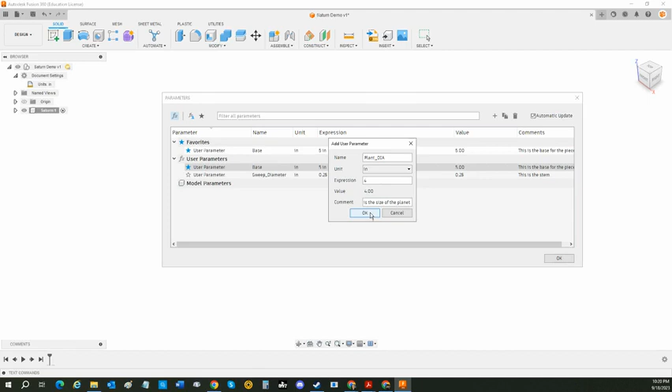So I have my base, I have a sweep. Let's make another one. We'll call this one planet, and I'm going to put underscore RAD, which stands for radius. Actually, I'm going to do diameter, DIA. Planet diameter, and that is going to be in inches. How big do I want to make this thing? Let's make it 4 inches for now. This is the size of the planet. That one may be changing, so I'm going to put that up top also.

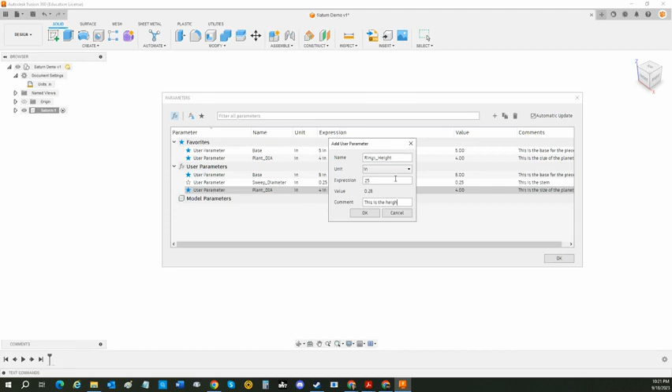So I have a base, I have the sweep, I have the planet diameter. I need the rings. So, rings... that should have been underscore. Rings height, I'm going to make this thing point, I don't know, 0.25 again. That sounds fine. This is the height of the rings.

Happy with that. Next one is going to be rings width. Make sure again it's all one word, so underscore rings width. And I'm going to make this thing 0.33. Let's make them a little bit wider than they are tall. This is the width of the rings. Oh my gosh, I can't spell this evening. Rings, there we go.

And finally, I'm going to put in here ring spacing, S-P-A-C-I-N-G, there we go. Ring spacing. And I'm going to make this one 0.4. This is the spacing between the rings.

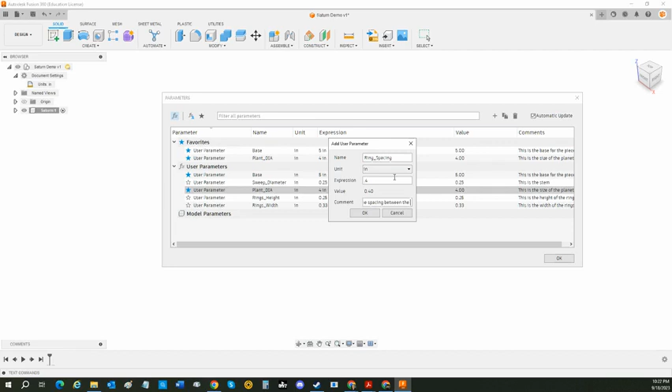I know a lot of these don't make too much sense for you, but go ahead and set these up, they're going to make your life a lot easier. So I have a base of 5 inches, a sweep diameter of 1/4 inch or 0.25, a planet diameter of 4 inches, a ring's height of 0.25 or 1/4 inch, a ring's width of 0.33 inches, and a ring's spacing of 0.4 inches. The neat thing is we can change these things around once we have Saturn built, and it will look just like how we want it to.

So I'm going to say okay, let's start creating. I'm inside of Saturn here, I have my focus on this. I'm going to go ahead and expand it out a little bit so I can see what I'm doing. I'm going to create a new sketch, and I'm going to put it right here on my XY.

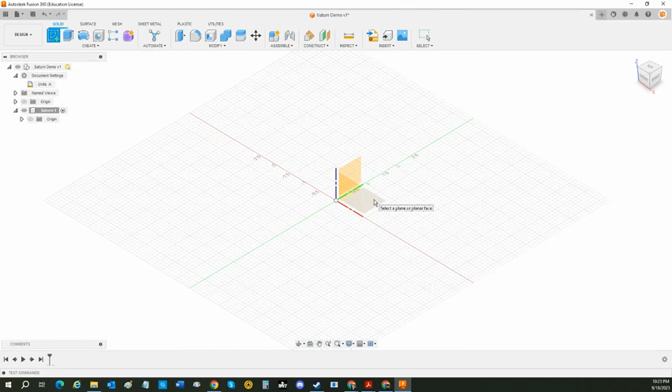Again, if you look at the view cube here, the red line is X, the blue line is Z, which means the line going opposite, which is green, has to be Y. I want to put this on the XY because if I was going to 3D print this, I would want it working from the base up.

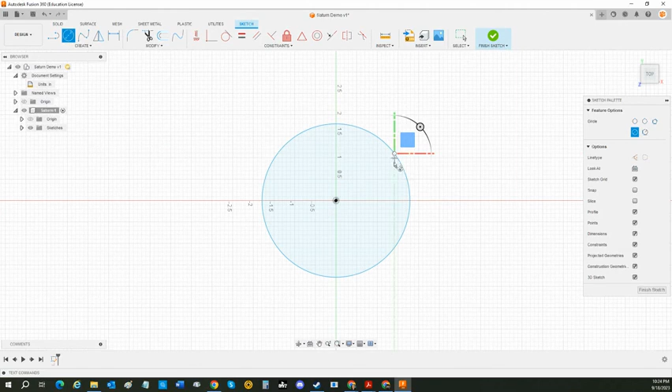So I'm going to select that, and I'm going to create a center diameter circle. I'm going to put this right on the center and pull it out, just like that.

Very good. Now I'm going to dimension this. We've done this before. Click the line, put it out here, and I call this one base. Yeah, the base. There it is, 5 inches. I'm happy with that. I'm going to finish my sketch.

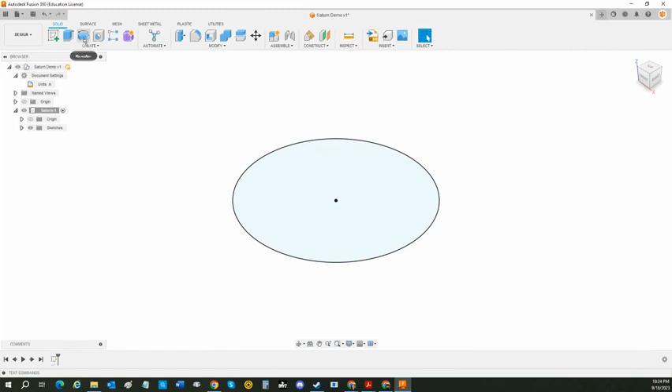I'm going to extrude this thing and bring it up, maybe 0.5 inches, and put it at a 45-degree taper, negative 45-degree taper. Ooh, that's ugly, maybe not so much. How about a negative 20? Yeah, it's better, I like that. Negative 20-degree taper. And it's going to be a new body.

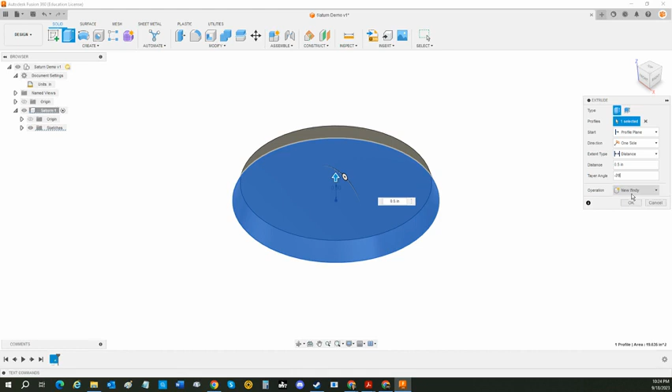And there we go, we're happy, sitting out in space. I'm going to go ahead and take this body here and expand it over here in my browser. Right-click body 1 and rename this thing. Where's that? Rename, there we go. And this is going to be my base.

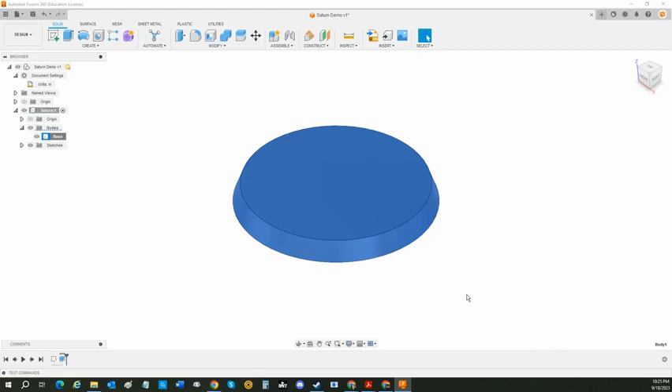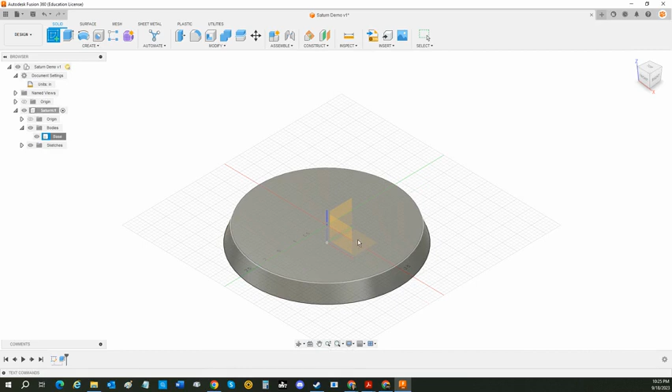Woohoo, I'm happy. All right, let's create. We're going to stay in sketch here because we're going to make multiple bodies in here. So I'm going to create a new sketch, and this one I want it to go perpendicular to what I have here at the bottom. So if I did XY before and I want this thing to stand up, I am going to do my XZ plane. You can see it pops right like that.

All right, so what we're getting ready to do is a sweep here. This is a really, really cool thing to do. It takes two steps, but again, it is really cool, so work with me on it. We have a create, and I want to create a spline.

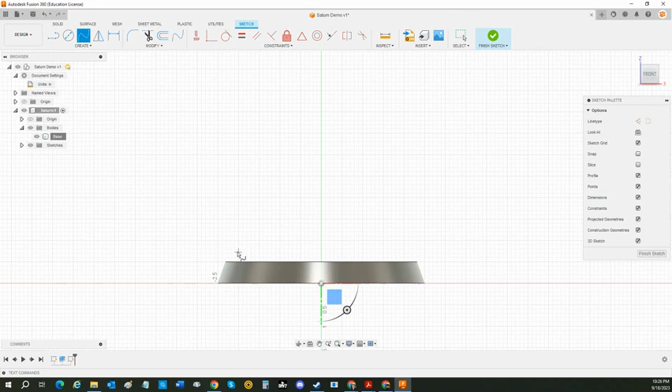A spline basically is a line that has curves based off of points. So I did add a new thing to you I didn't tell you about. And I'm just going to go ahead and create some type of S here, put a few things in here.

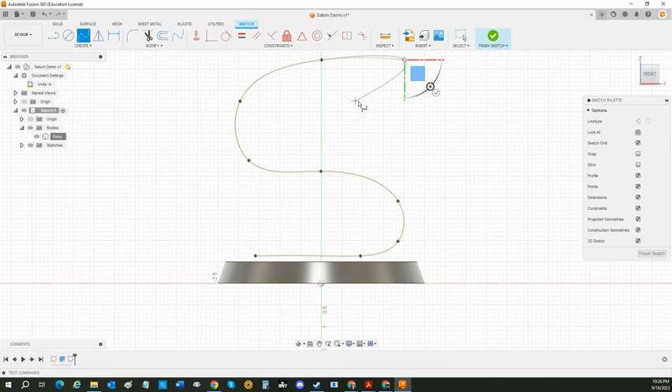It's up to you how you do this. I have found that putting dots in the center line here helps me out a little bit. So I'm happy with that. When I'm done, I'm going to come grab this check mark and hit the check. And there we go, I have this really cool little S going.

Next thing I'm going to do is see if I can put a dimension on this thing. I'm going to go from the bottom line here. It's not going to let me. I think that's a base point to the base of this thing. And we've made that point two. There you go, and it kind of moved up a little bit.

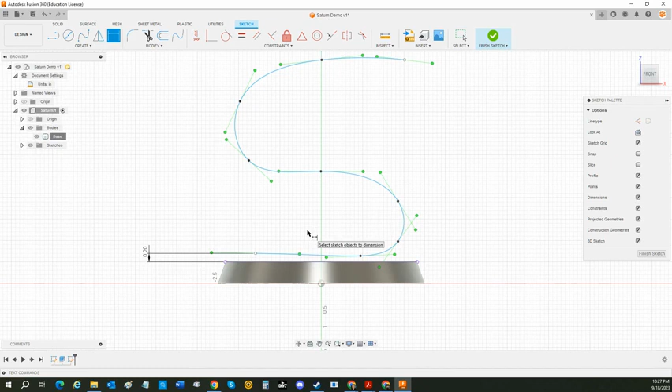I'm happy with that. I could align these things if I wanted to, but I think I'm going to be happy here. Yeah, I could move this up, but I'm going to be happy with that. All right, so I have this sketch here, which is my S.

I'm going to come back here. You notice I've already violated rule number 2 of Fusion, which is name everything. So I need to name these sketches here. I'm going to name sketch 1, that was my base. Sketch 2 is my S path. All this is a path is the only thing we drew here.

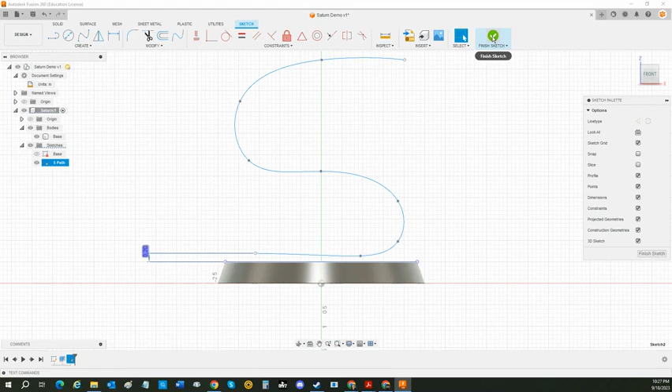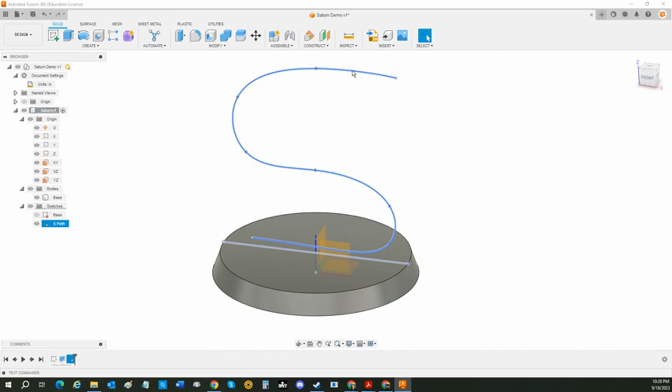Looks pretty cool, so it's sitting out there in space. Looks pretty. Woohoo. All right, the next thing we're going to do is create an offset plane. What an offset plane is, as we look here at the origins, if I were to show these planes, before we had our XY, our YZ, and our XZ planes, I can also put a plane out in space. For instance, the top of this base here is a plane. This edge here, if I were to find a flat spot of that, that would be a plane. But what I want is a plane that is completely perpendicular, or at 90 degrees, to this S.

So what I'm going to do is come up here under Construct, and I am looking for Plane Along Path. Here we go, it's saying what is your path? Here's my path, and I can put this thing anywhere I want. I'm going to take this arrow here, you see I can just drag the arrow, it goes everywhere I want. Woohoo, I'm going to put it all the way to the end because I want this thing sitting directly at the end of this thing. So I'm happy, and I'm going to say OK.

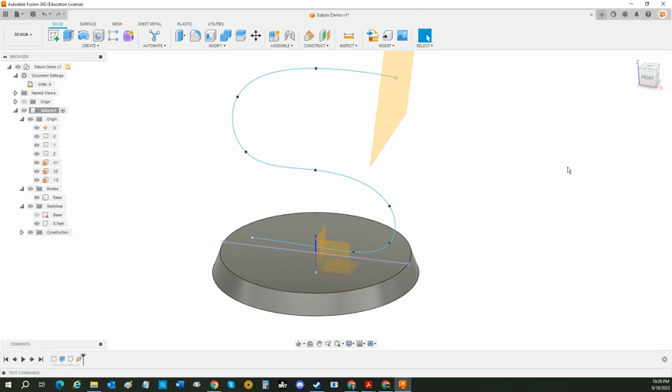This is that construction plane, and that's what I'm going to work off next. You're going to see also it shows right here under my browser, under construction. This is the plane here. I'm going to name this thing plane for sweep.

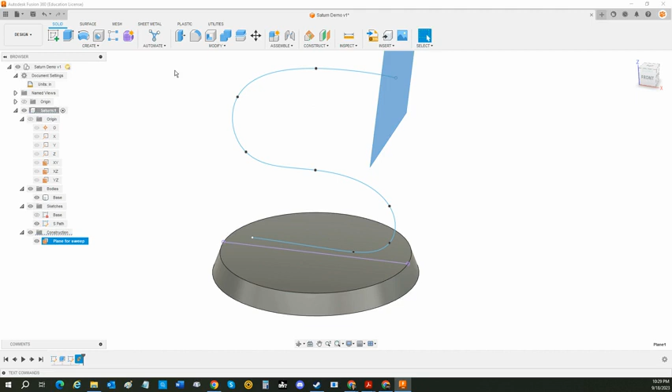So I'm going to make my circle here and be happy. Let's create a new sketch right on that construction plane. I'm going to come right off the center spot here because that's where I have this thing sitting on.

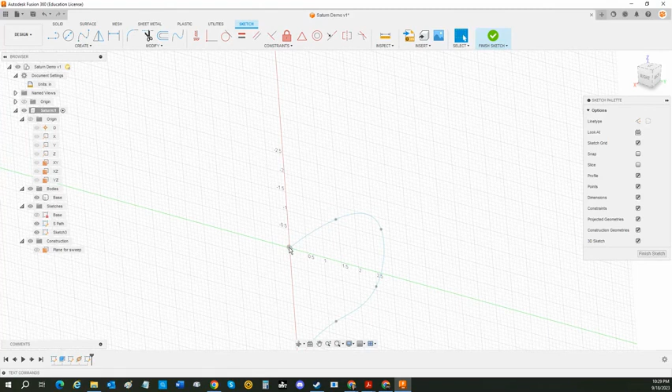If I were to flip this thing around a little bit, you can kind of see it. That's where that plane is, along my path. It ended right here where I put the origin point, which is very helpful to me. So I can create a circle right here. I don't care how big it is because I'm going to put a dimension to it.

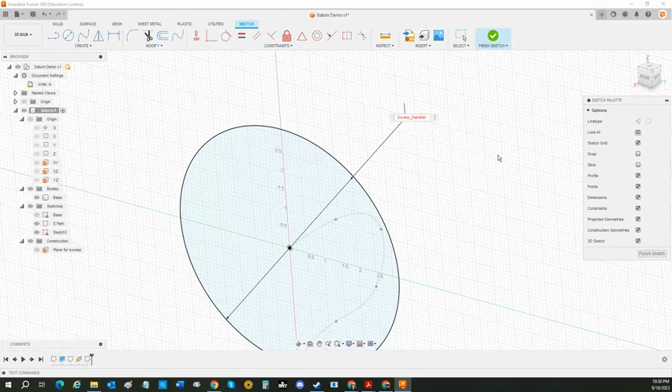Now I'm going to put my dimension. And what did I call this thing? Sweep diameter, there it is. I now have my sweep diameter. I'm happy with that.

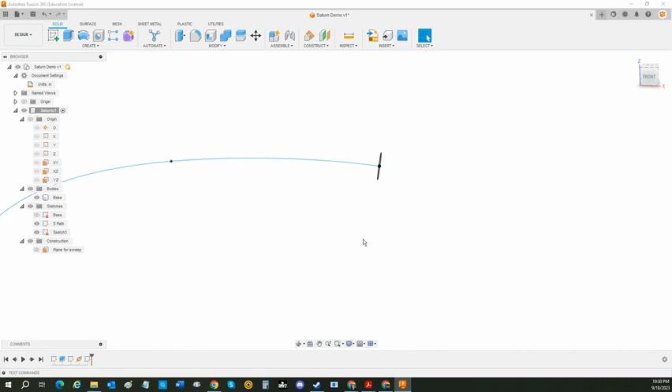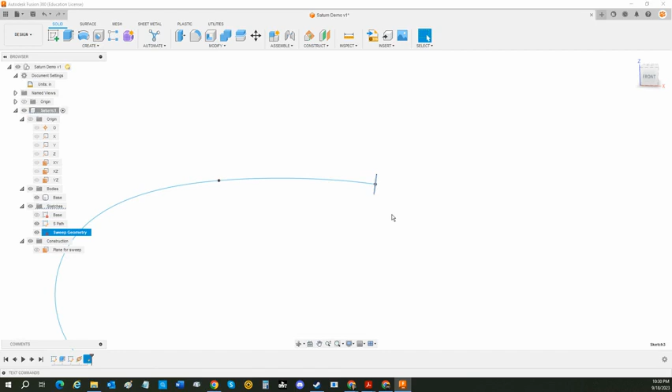Okay, so I have my path, and perpendicular to it, I have this little circle here. If I wanted to look at that plane, it's right there, but I don't need to see it again. I am going to name sketch 3 here. This is my sweep geometry. It is a sweep geometry, but you can call it something else if you want to. I don't know, circle for the sweep, whatever. But it's a sweep geometry for me.

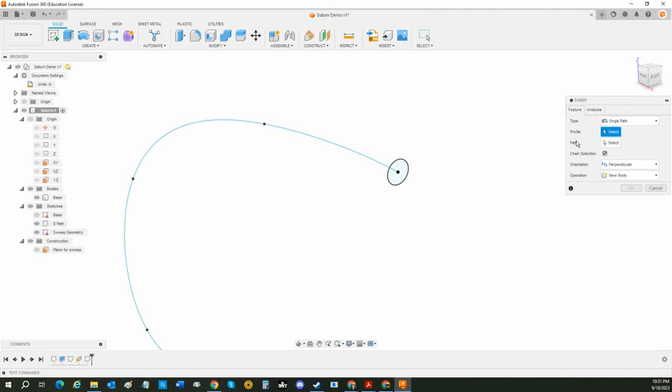All right, let's watch the magic happen. I'm going to come under Create here, and I'm going to come down to Sweep. It brings up this neat little tool. I'm going to zip this around a little bit, zoom in. My profile is that circle, my path is right here, that S path.

And there it is. What this thing just did - I'm going to put this to the home - it just created that profile all around this path. It even turned it and everything for me, so I'm really happy.

I can change my orientation to always be parallel. It looks pretty ugly like that. In fact, it doesn't even work. So I'll go back to perpendicular.

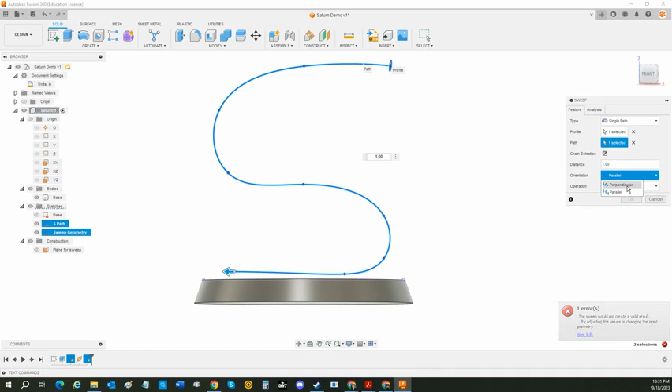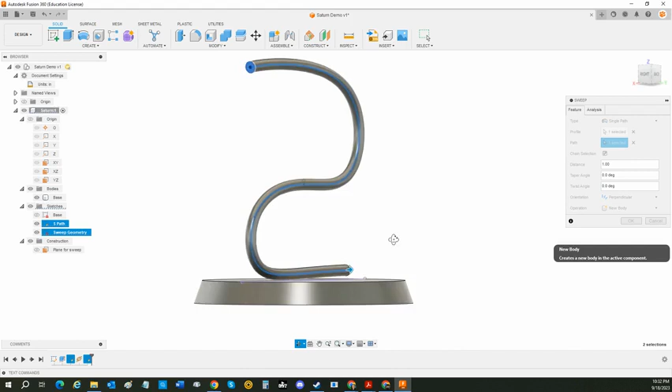Happy with that. My operation, I can join this to the base if I wanted to, or I can say it's a new body. I'm going to make this a new body. I'll probably have to bring this down a little bit, but that's okay. And say okay. There we go.

I now have that neat little S for Saturn. I'm happy with that. Again, I might make that a little thicker. It looks a little goofy. Let's come back here to my parameters, change parameters.

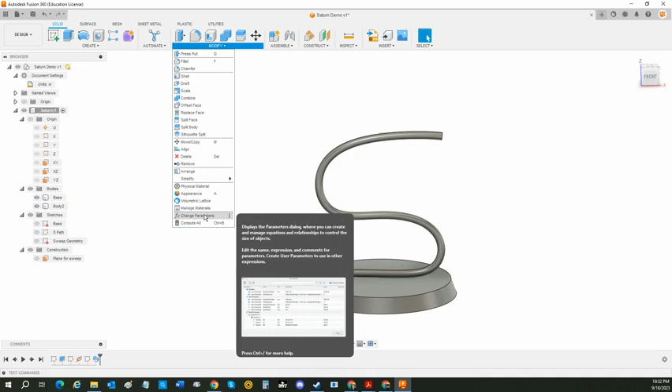And I made that down here, sweep diameter. I'm going to bring it up top here. I'm going to make that 0.35 maybe. Say okay. It looks a little better, a little thicker. And it's now coming into my base here, so I'm happy. I like that, I like it, I like it. Okay.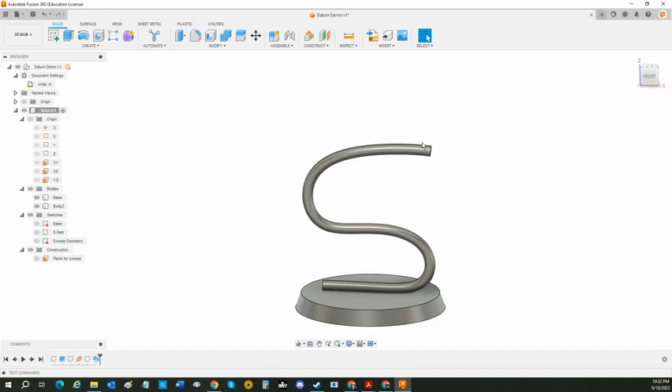Now let's go ahead and create Saturn. To do that, I am going to create a new sketch. Oh, I need to come up here real quick - this is my bodies, and this is my sweep. Everything's labeled, I like that. Minimize that, here we go.

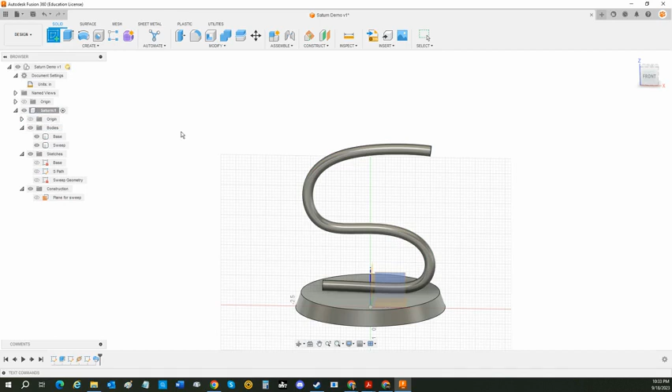My new sketch, I am going to put this on this plane right here. And what it is, it's parallel to my, or the same plane as my S here. So that looks like it's going to be my XZ - you can see it up here on my view cube. Put it right here on that plane.

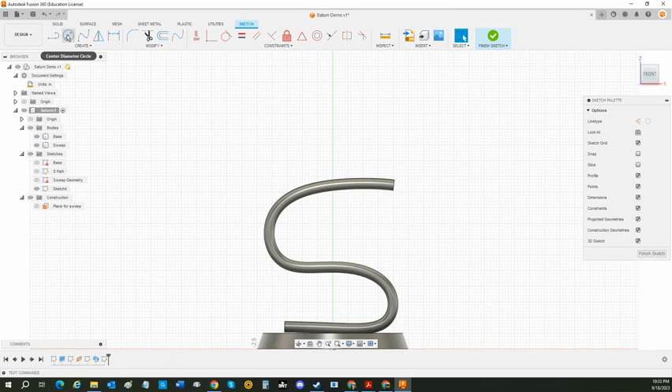And I am going to draw Saturn, or at least half of Saturn. So I'm going to create a center circle, make that nice and big. I'm happy with that. I am going to now dimension it. And this thing is planets, I believe I called it - planet diameter, there we go.

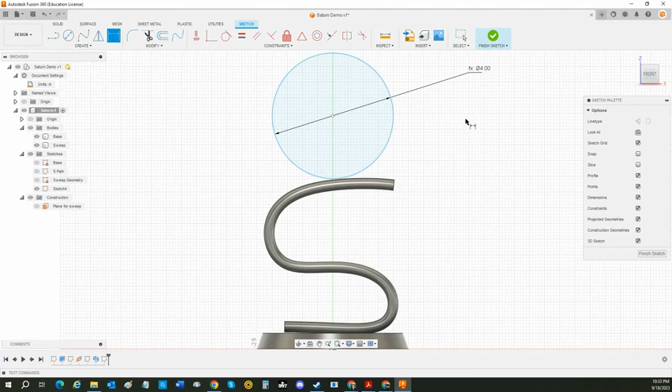Pretty good. I am going to put a line straight from the top here. You notice it wants to lock in based off of that axis at the top and at the bottom. There we go. And I'm going to take this side over here and get rid of it by coming up here to my trim tool - so there's another tool I didn't tell you, you're going to learn. I'm going to trim off this left side. So I now have half a planet, but that's exactly what I want. Very good.

And you can see it's still giving me my diameter, so I'm happy with that.

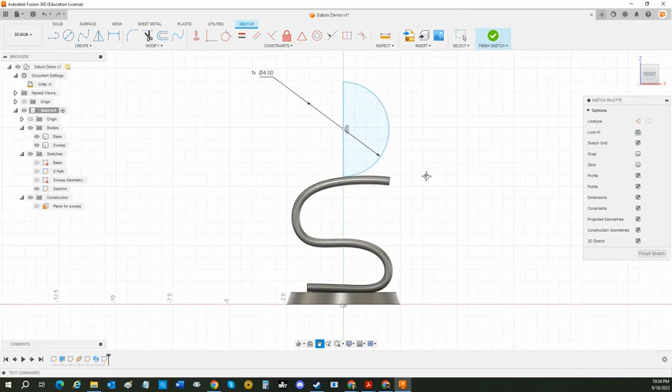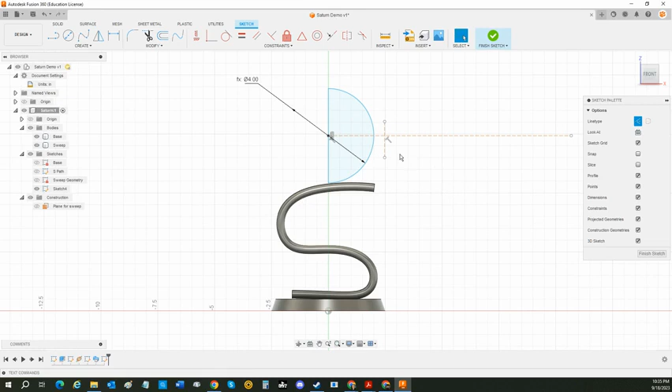All right, let's create some rings for Saturn. I'm going to make a construction line just so I know what I'm working off of. I grab the line, grab construction, come right off the center point, and go straight out. It just gives me a spot to line up and start with, makes my life easier. I'm going to grab another one and pull it off of Saturn here just a little bit. You can see this thing's constrained at 90 degrees, so I'm happy with that. Later on I may go and change this distance, but for now I am happy.

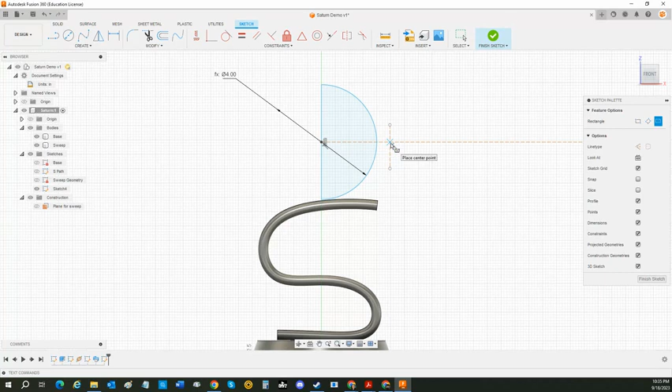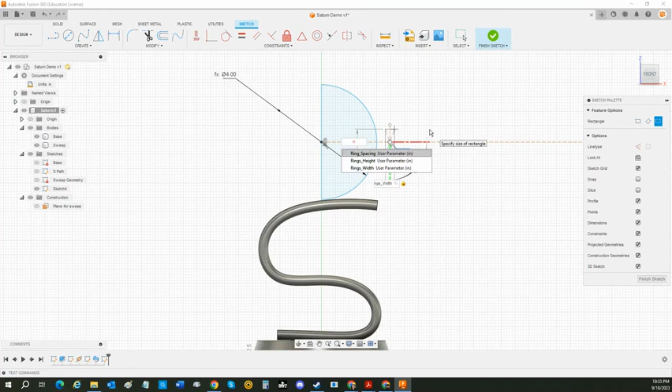All right, let's go ahead and create a rectangle, and I'm going to make this a center point rectangle, based right off of that center point I created. I'm going to come out, and the bottom one shows the dimensioning happening there. I called that one the ring width. Hit tab, I have my ring height. Told you we were going to use these things again. There we go, good, I'm happy with that.

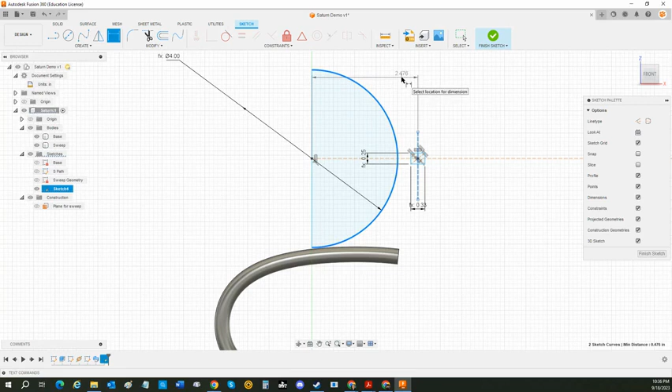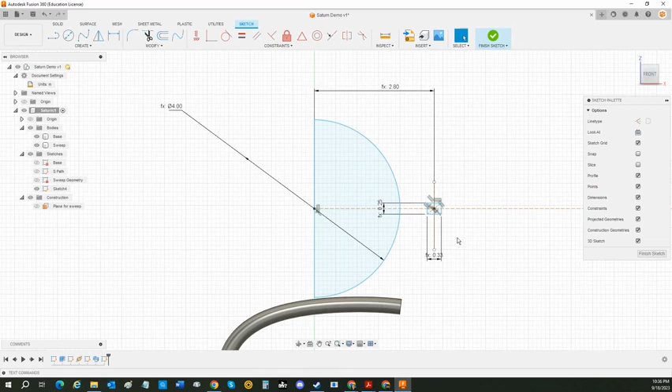I'm going to put in another dimension from this line to the center of Saturn here. I'm going to pull this up and call this one planet diameter divided by 2, so I have my radius, plus I'm going to put open parentheses. I'm going to call this one ring spacing, times 2, close parentheses, center. All I did was move the center point out a little bit, that's all I did. I'm happy where that's at. Cool.

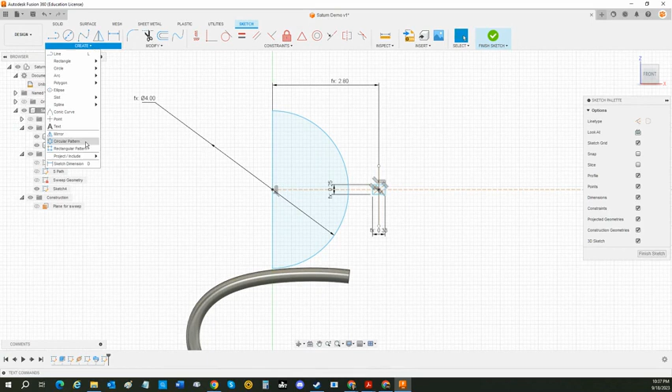Now let's go ahead and set our rings up here. I'm going to do something called a pattern tool. If you come under create, see this rectangular pattern? That's what I'm going to select. It's going to ask me what my objects are, I'm going to zoom in and grab all 4 of these lines. 1, 2, 3, 4, very good.

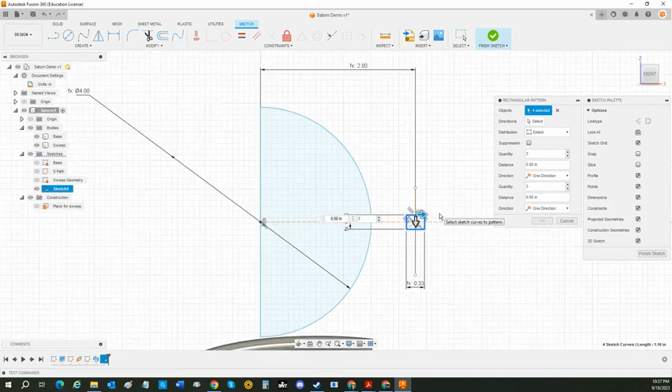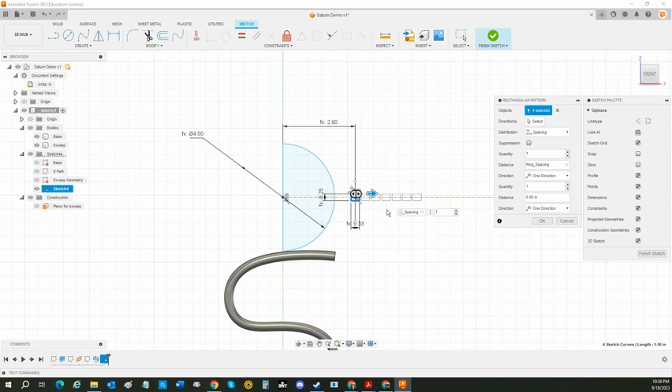Quantity in the first direction. What I tend to do is zoom out a little bit so I can see what this thing's trying to do, and I'll grab this arrow and move out this way. You see the distance showing up right here. I believe there are 7 rings, let me count: 1 through 7... yeah, 7 rings. For my distribution, I can do extent, meaning the total distance, how far out do you want this thing to be, or the one below that is spacing, how much space do I want between these things. I'm going to do spacing, from center to center, so my distance is ring spacing. Happy with that. I only need 1 in the opposite direction, so I'll go with that, and I'm going to say OK.

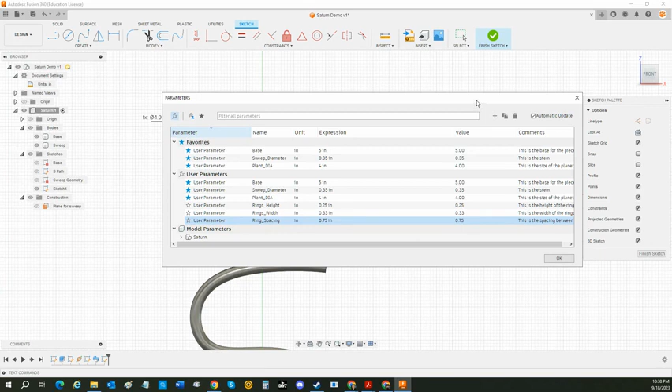And what it just gave me was this pattern right here of rings. I really don't like that ring spacing though, let's change that because it's going to bug me. Change parameters, ring spacing - instead of 0.4, let's make that 0.75. How does that look? Ooh, that looks much better, I like that.

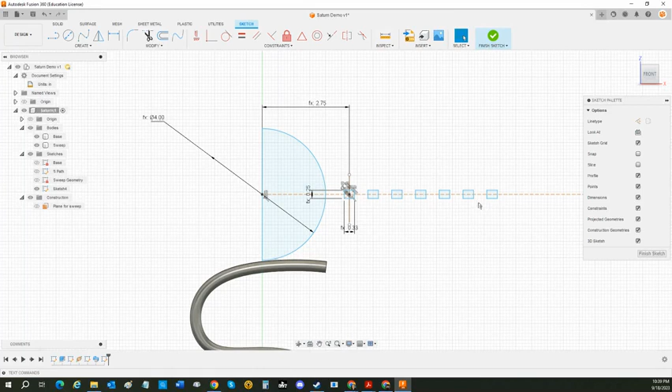Okay, so I like this spacing now over here. I'm going to come up here and change this. What if I just do times ring spacing? How's that look? There we go. So what this is now is planet diameter divided by 2 plus ring spacing, that's all this is. Order of operation will be planet diameter divided by 2, and it's going to add my ring spacing. And here we are, okay, so I have half of Saturn, and I have the profile of all of Saturn's rings. I'm happy with this.

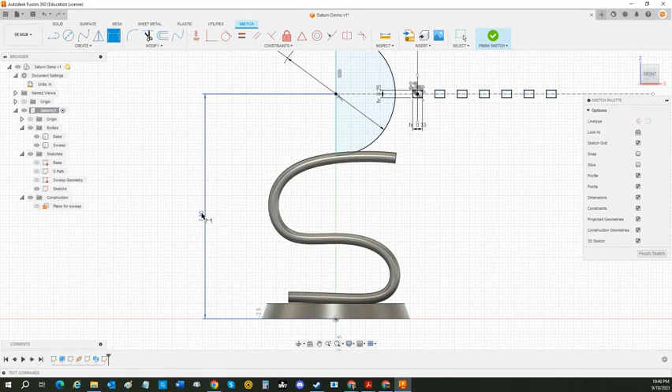So let's go ahead and get Saturn to the height that I want it to be. I'm going to do a measure real quick, I want to see from here to the origin. That's sitting at 7.4, I want to bring this down just a little bit, so I'm going to probably make this dimensioning like 7.3. So I'm going to come from the center to the origin, move this over, and make this 7.3, let's move it down slightly - that's a little bit too much. How about 7.35? There we go, and all I want is the planet to barely get inside of this ring, that's all I'm going after.

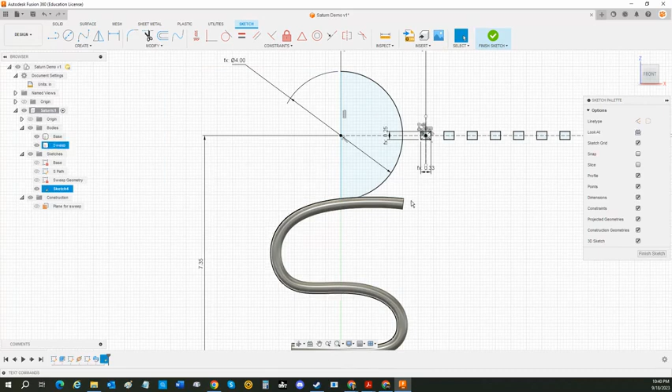Very good, everything looks great. I could dimension this line out too if I really wanted to, but I'll just say it's a driven dimension. I don't need to, so I'll get rid of it because it's ugly. All right, there we go.

We're about to have Saturn done. So I'm going to finish my sketch and name it. This is Saturn and Rings. There we go.

Now we're going to use our final tool, which is the Revolve tool. I'm going to come up here to create, and you see it's up here also Revolve, looks like a little quarter donut. Or you can come under create and down here to revolve, either or. I have my revolve tool, my profile.

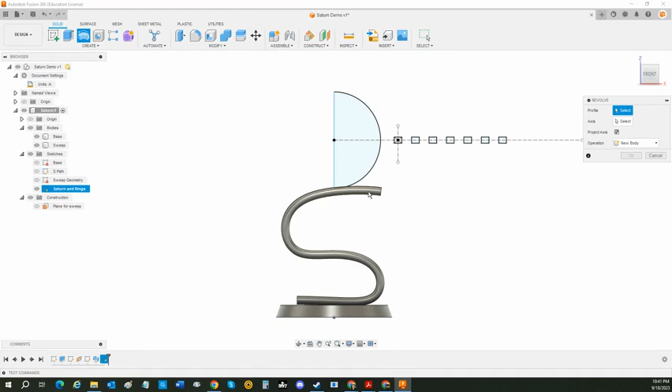I'm going to grab each of these rings, and I'm going to grab the half of Saturn here. And it's going to ask me for my axis, so I'm going to select that, and I'm going to grab this center line going right through the middle of Saturn. I'm happy with that.

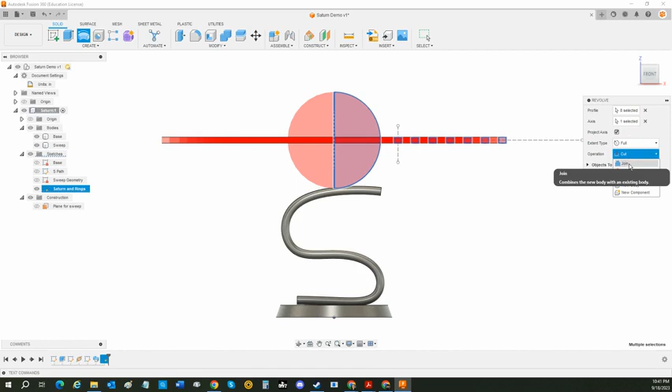I'm going to go to extent type, we're going to do full. We are going to change our operation from cut to new body. Check that out. Saturn's looking pretty cool. All right, so I'm going to say OK. And there we have Saturn sitting inside of this piece.

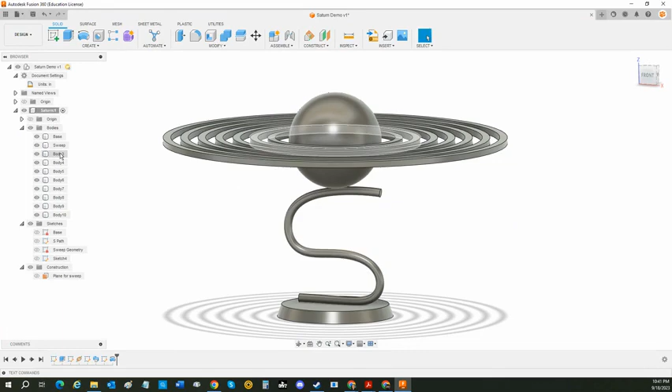And we now have a bunch of things we need to label. This is ring 2. So what I'm doing is highlighting over top of these things and figuring out which one they are. This one is ring 6. I have no idea why I did it in this order. This is probably going to be different. Just figure out which ring is which. Ring 5.

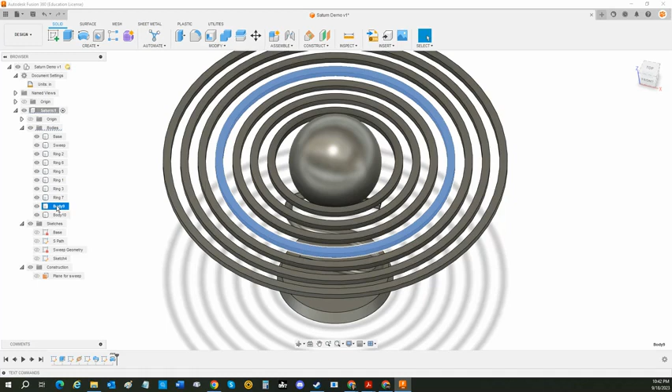And label away. Ring 1. Ring 3. 7. Ring 1, 2, 3, 4. The last one should be the planet. Yep, planet.

There you go, so I have all my bodies now named. This sketch here, I need to name this thing. And this is planet and rings. There we go, everything is now labeled. If I were to go back and look through this thing, I know exactly what I'm looking at, which is really, really cool.

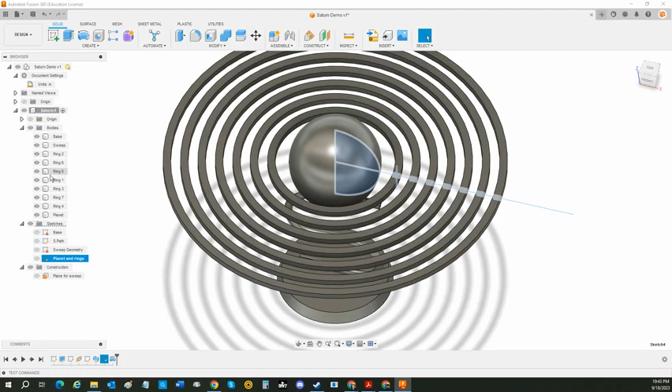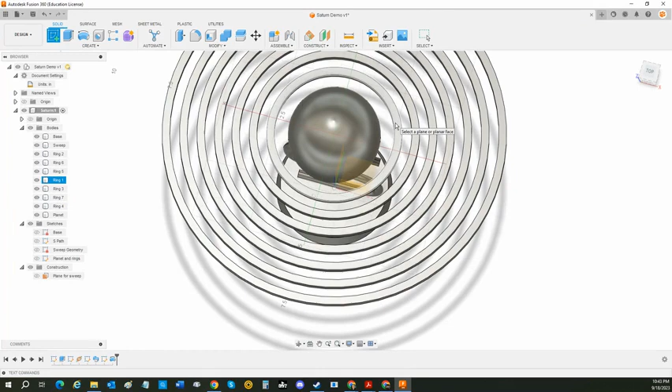I think one final thing I'm going to do, because these rings would just fall down if they were just sitting there, is I'm going to connect them. So I am going to create a new sketch. I'm going to put it right on the top of these rings.

And I'm going to grab a rectangle, or let me grab a center point rectangle. Center rectangle, I'm going to come right off this origin point. I'm going to come all the way out. Let's see here. Let's make the height of this thing what? Let's make it ring width. It looks pretty cool.

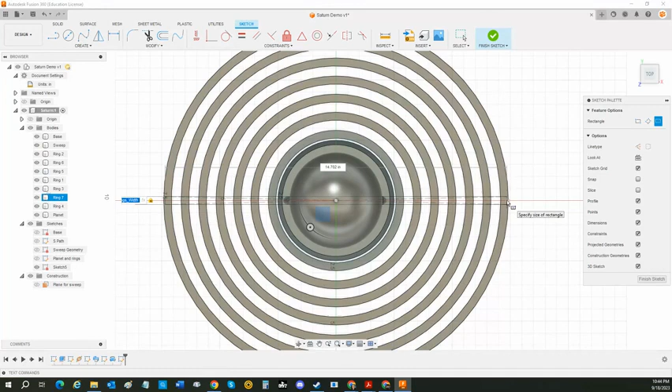And I'm going to come all the way out to that little point, you see it on the right side, it's turning white. I'm going to lock right into that edge. I'm happy with that. Yep, this will work. I'm going to finish my sketch. I'm going to call this thing a locking bar. L-O-C-K-I-N-G space B-A-R, locking bar.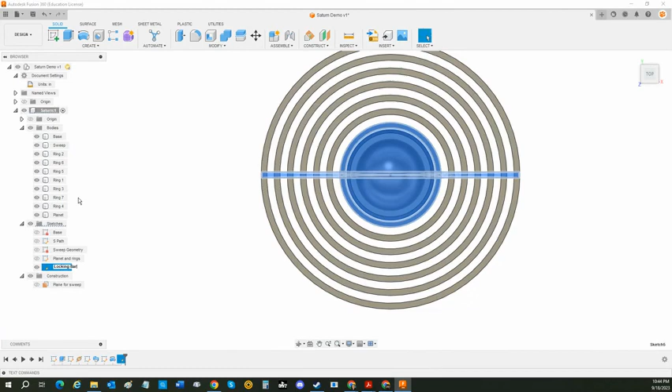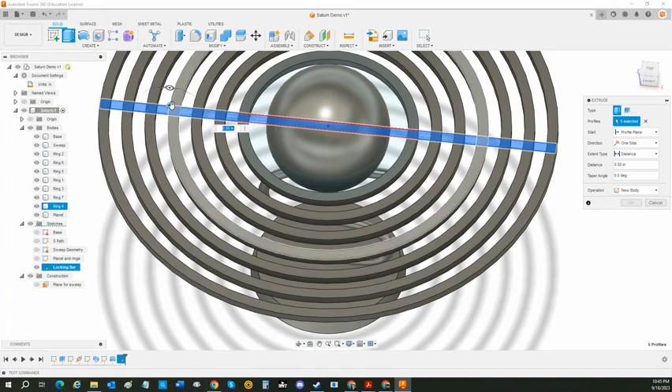I'm going to extrude this thing. Extrude it, what is it? I'm going to extrude. Now I have to go through and grab everything. There we go, that has everything for me. I'm happy with that. I am going to take this thing down.

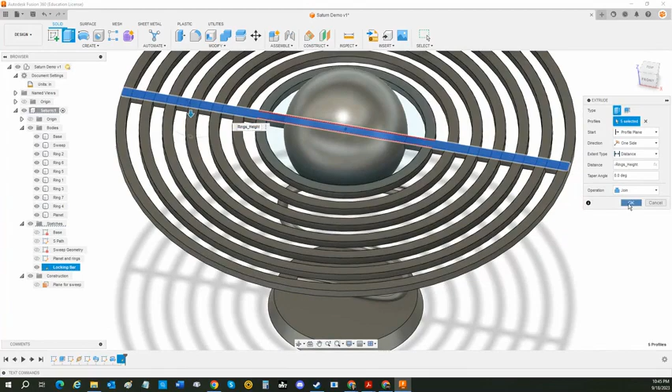So you see it just turned negative right in here. So I'm going to do a negative ring height. These things match. And in my operation, I'm going to call join. This looks about right, say OK. And there we go, I now have this bar locking everything in place.

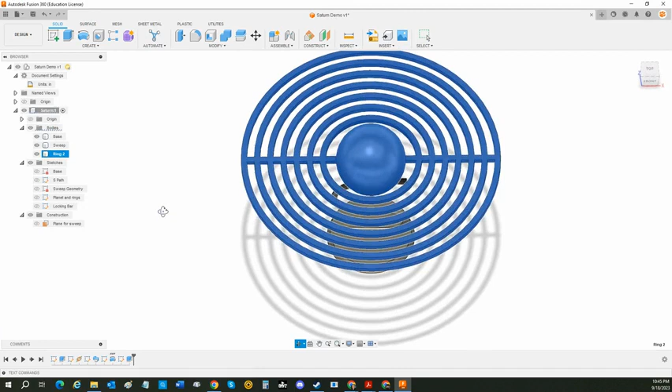Although it's not real, because you wouldn't see that out in Saturn, but it doesn't matter. This thing is more to show that it has rings. And I'm happy. All right, so what I ended up with, and it looks like, where did I put it? Put it with the rings. Yep, put it with the rings.

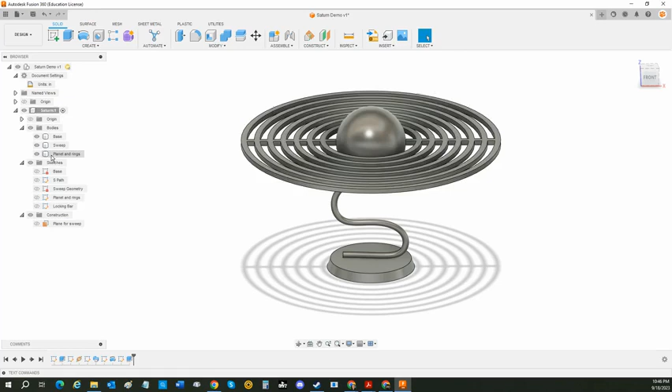I'm gonna, actually it looked like it took all those things that we labeled before, created into one body, which is really, really cool. I'm actually gonna rename this now. Planet and rings. Cool. All right, and there we have it. We have Saturn. It's one component, so it's all one big piece here. It has 3 bodies in it, and that makes up our diorama.

If you all want to see it work, I'm going to take my history all the way back to the beginning, hit play, and this is us building Saturn. And that was it. If you have any questions, just let me know.

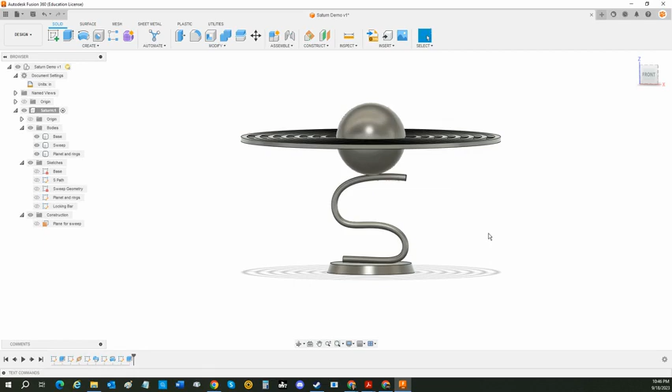If you wish to color it, feel free. Again, that's all right there in the appearance, or you can change the physical material and the appearance. Have any questions, let me know.